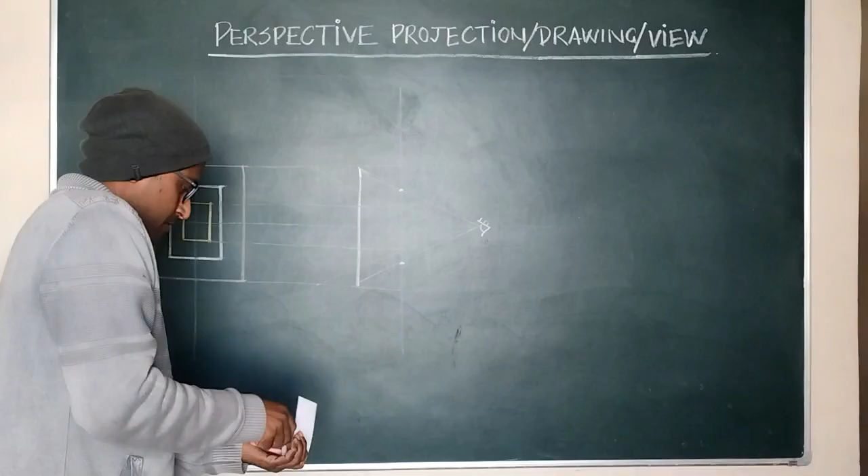Suppose the height of this vertical plane is L. From here to here, this height is L. This is the true length of the vertical plane. Now this is the picture plane, we can write PP. This is the station point. So this is the station point, this is the picture plane, and this is the object.

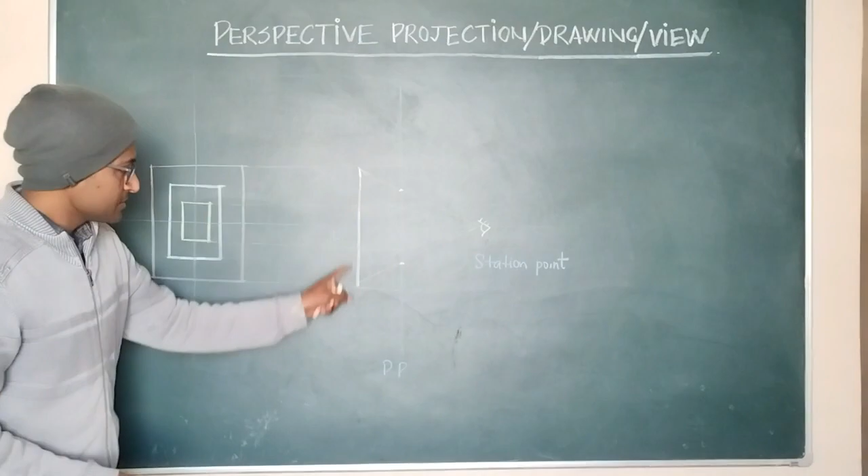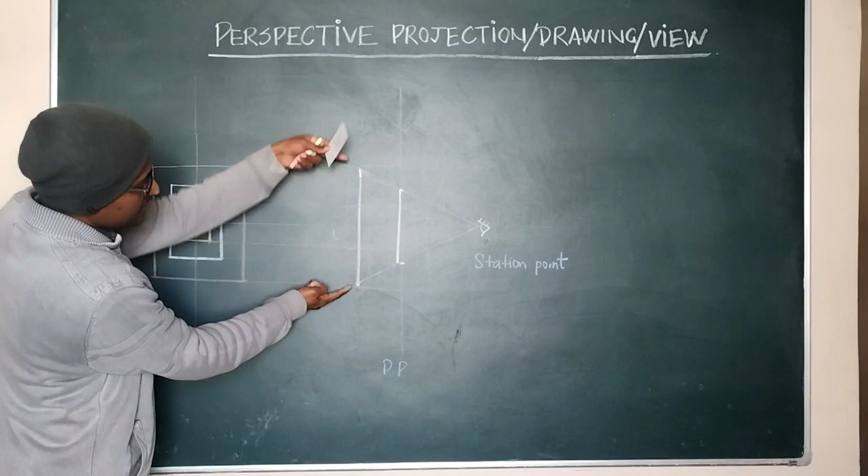From the eye, I am drawing a ray to the upper part of this object and to the lower part of the object. If you see carefully, this ray cuts somewhere here and this ray cuts somewhere here. So the image I am getting on the picture plane is this one, right? The true height of this plane is L, but we are getting only this much. We can write small l. So obviously small l will be less than capital L.

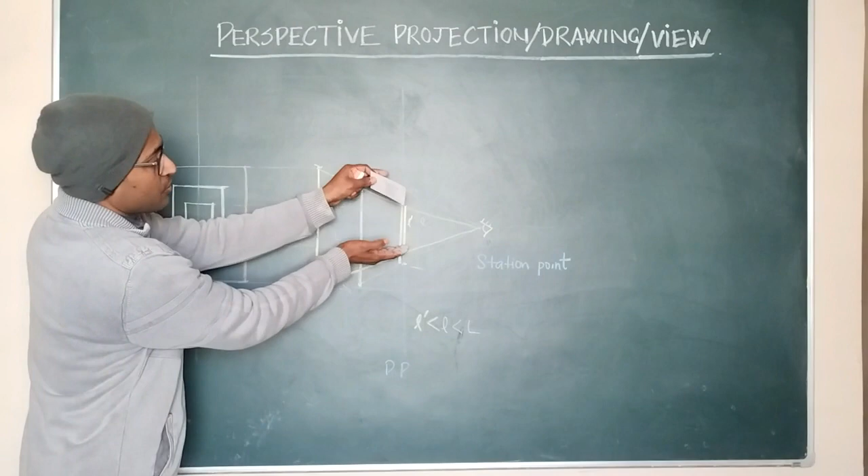Now I am moving this vertical plane away from the station point and keeping it somewhere here. Again the true length will be L. If I draw the ray from here to the station point and from here to the station point, the picture I get at the picture plane will be this much. Suppose this is l dash. So l dash will be less than small l, and obviously less than capital L. Now we are very clear: if I move the object away from the station point, it looks smaller. If I move it towards the station point, it looks bigger.

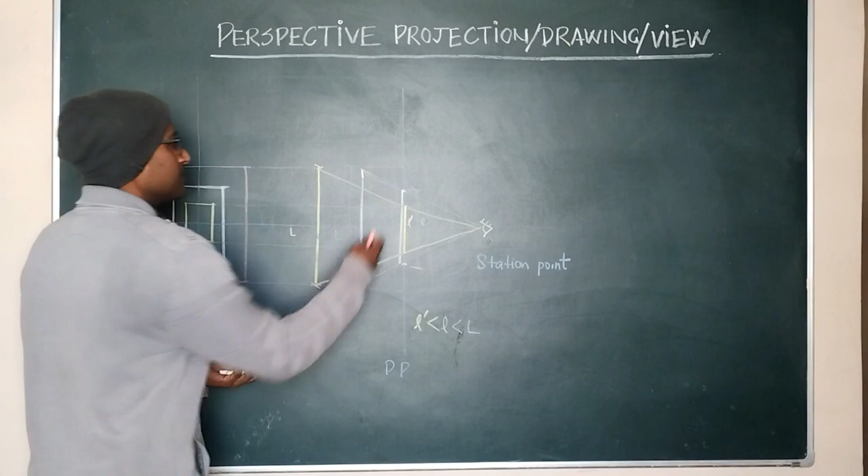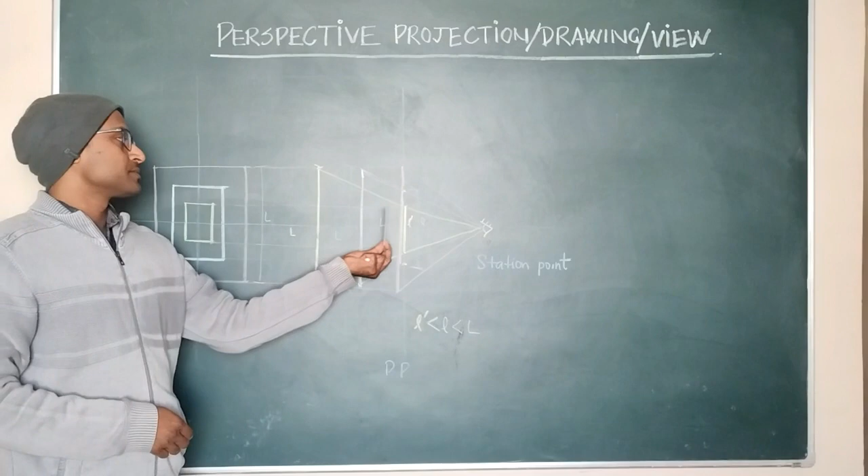Now let's put this vertical plane at the picture plane. So obviously we will get the true length. This will be L. Now we have a clear understanding. If I move the object away from the picture plane and away from the station point, it looks smaller. If I move it towards the station point or the observer, it looks bigger. And if the object touches the picture plane, you will get the true length.

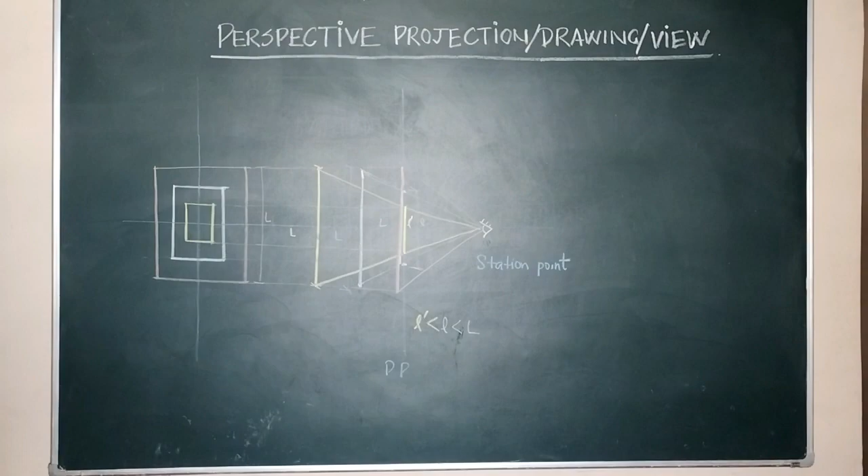Now let's see again in the camera. This is the vertical plane. If I move away from the observer, it looks smaller. If I move the object towards the eye, it looks bigger. And when it touches the picture plane, it gives the true length of the object. Right? Now if you ask how to get this width of the object: the height we can get from the side view. This is the side view.

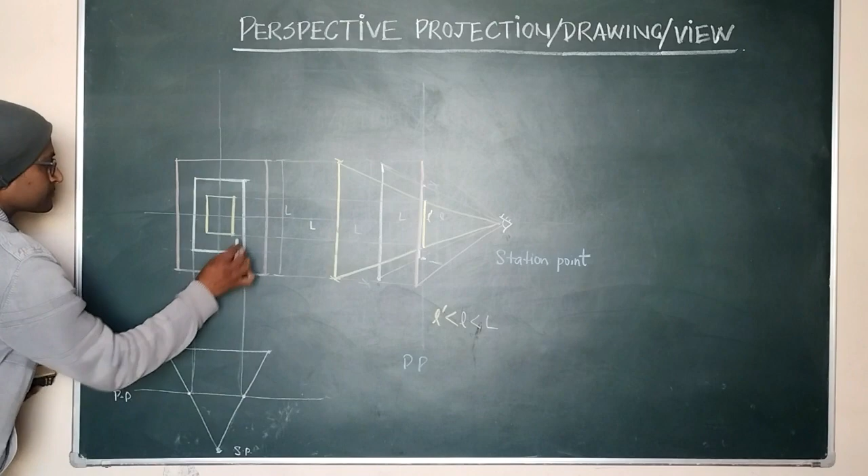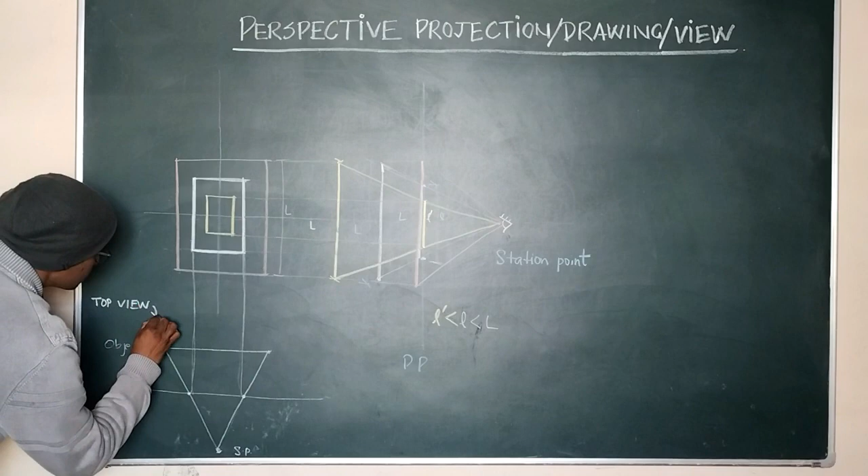Now if I draw the top view, suppose this is the picture plane, this is the object, and here we have the station point. If you draw the ray from this point to the station point, it cuts the picture plane somewhere here, and from this point to the station point, it cuts the picture plane somewhere here. Now I can take the projection from here and again from here. So this will be the final view of the object. The width I can get from here. This is the top view, and this is the side view.

This height of the object or of the picture we can get from this side view. This is the station point, this is the object, this one is the picture plane. If I draw the ray from this point to the eye, it cuts the picture plane somewhere here. So this height we can get from the side view.

Now for the width, we can draw the top view. This is the station point, this is the object, and this is the picture plane. I draw the ray from this point to the station point and again from this point to the station point. It cuts the picture plane here and here, and then I take the projection. I will get this view of the plane. The technique or procedure to draw perspective projection we'll discuss later. Right now we will try to understand how the object will look with different positioning.